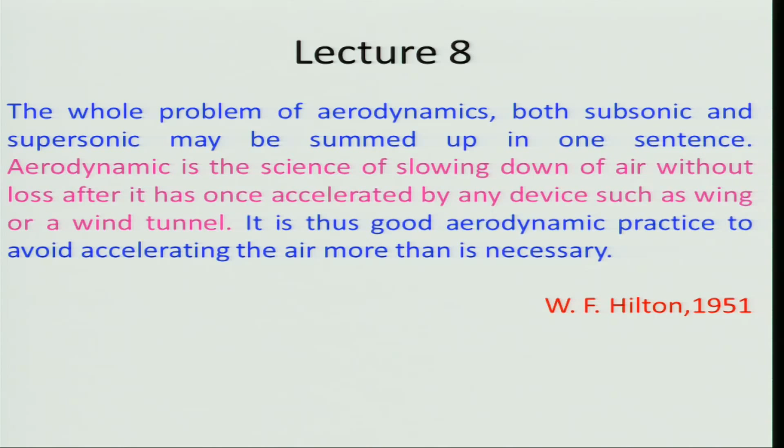Aerodynamics is the science of slowing down air without loss after it has once been accelerated by any device, such as a wing or a wind tunnel. I would suggest this applies whether it's flow over a wing or flow through propulsive devices. It is thus good aerodynamic practice to avoid accelerating the air more than is necessary. This is a very important statement, meaning we should not accelerate the flow beyond what is required, and that is the basic principle in designing a propulsive device.

And so, in analyzing this, we need to look at compressible flow. I had already initiated discussion in the last lecture on compressible flow, and if you recall, I asked whether a fluid or a flow will be compressible. Then we define a term known as the compressibility factor.

We are using the symbol K, but there might be other symbols for compressibility factor. I told you it is the change in density divided by the change in pressure — in other words, change in density per change in pressure, per unit density. That's what we call the compressibility factor. We also talked about other definitions, because this is a more general one.

To be more specific, one has to talk about the compressibility factor for isothermal flow conditions or for isentropic flow. Considering the flow to be isentropic, we use those definitions to derive the equation for speed of sound.

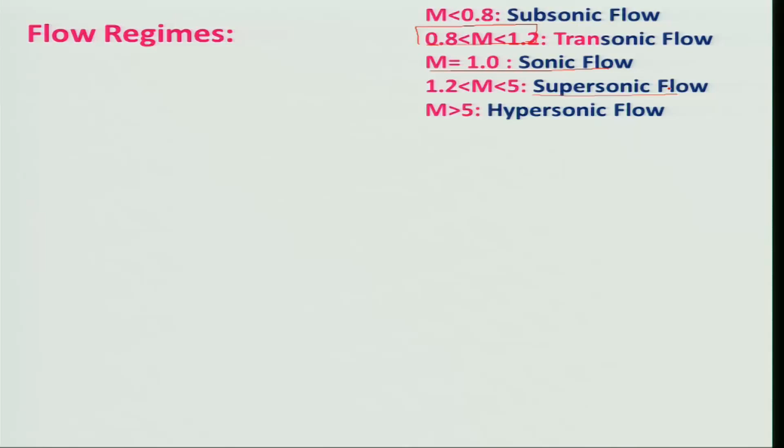The question is, when can we call a flow subsonic? For that, let us consider a flow over an aerofoil. This is basically a slender body, and if the Mach number coming is less than 0.8, that means it is subsonic according to this regime.

Now, what will happen if the flow has uniform velocity? Here you can see these arrows showing uniform velocity, and if it moves giving a smooth streamline around this aerofoil - what does it indicate? It will be subsonic. If it is subsonic throughout this region, then we call it a subsonic flow.

But I have a doubt - why are these streamlines like this? If flow is coming, for example, over here, something like a uniform flow, let's say in a wind tunnel kind of setup, because uniform flow in nature is difficult to get.

So what will I do? I will put a body like a slender body, aerodynamic or aerofoil shape. If I do that, what will happen? The fluid will be moving. If I take this coming over here, it will be impinging, and then there might be another one, I can see it goes this way. Why does it go? Is it intelligent like us, that fluid element?

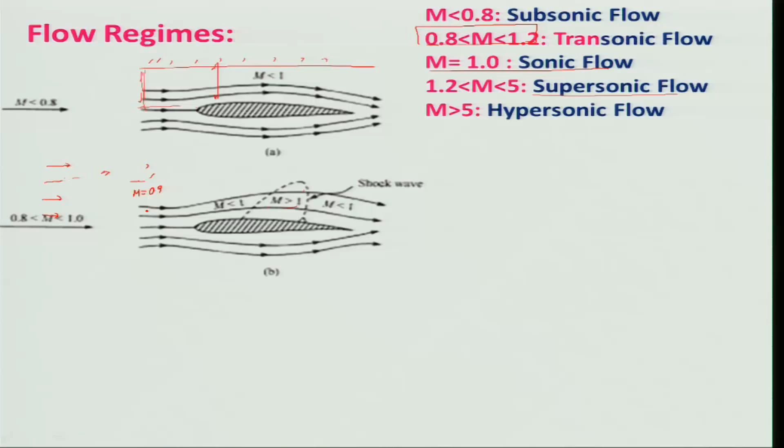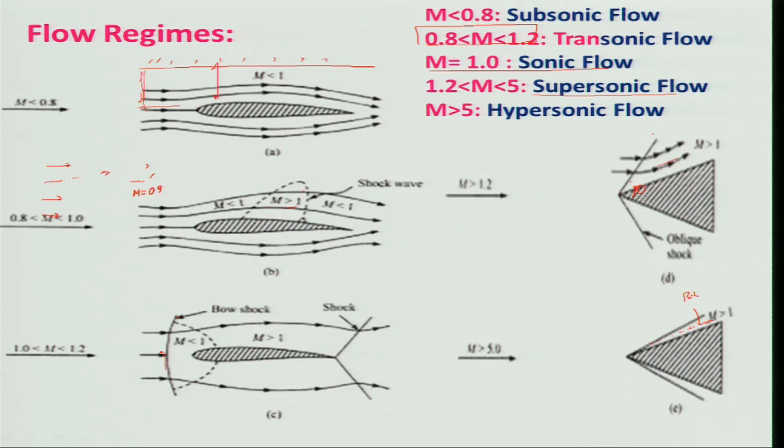So this is the flow regime which you must understand, and we will be revisiting it in detail about oblique shock, and there will be a normal shock in some region that we will talk about, and how to handle expansion shock, expansions and other things.

Now I want to analyze this, and as the name indicates, this is adiabatic flow. Therefore there will not be any heat interactions, heat is not going out, and it is steady. For that, we can consider it as a steady one dimensional flow.

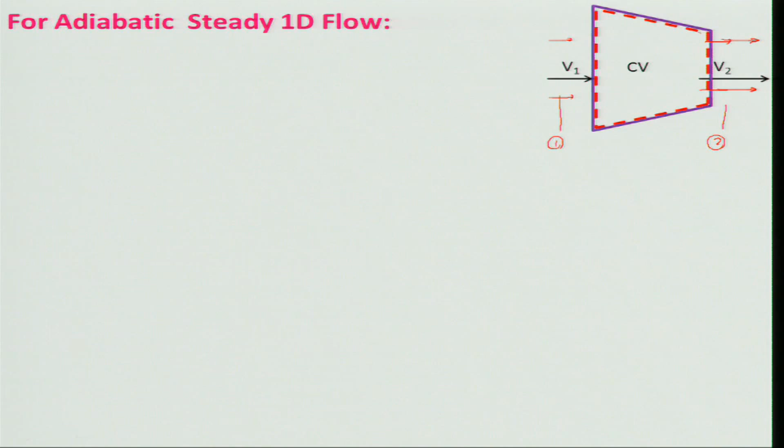And then we will have to apply the first law of thermodynamics for the control volume. What are the conditions we will be looking at? We will be looking at the adiabatic condition, Q will be 0, meaning Q, the specific heat interaction, is 0, and there is no shaft work as such.

But can I consider this as a one dimensional flow? Is it possible, or will it be two dimensional flow, or three dimensional flow? It will be two dimensional. Is it so?

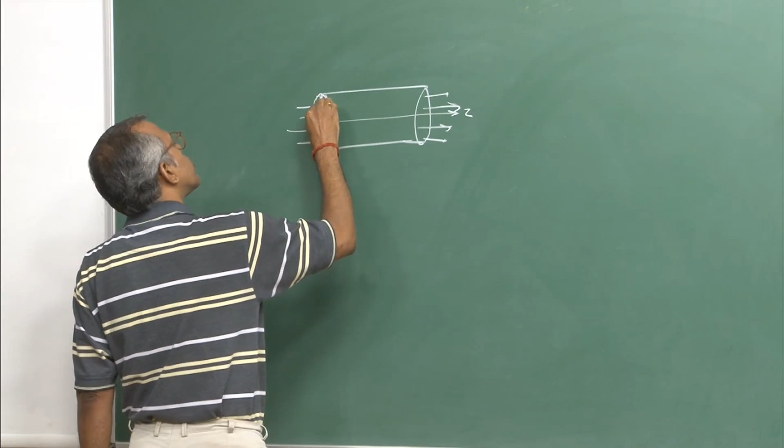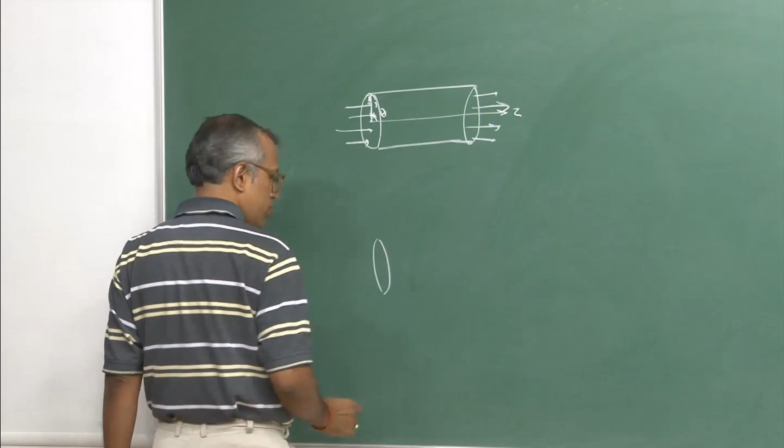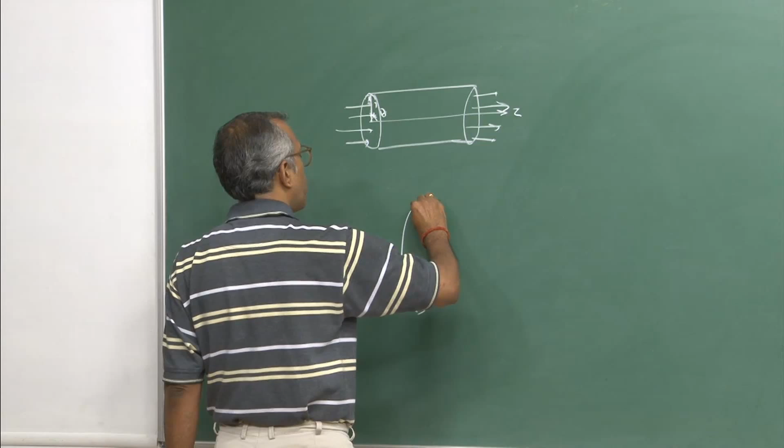For example, if I take a pipe flow simply in a constant area, flow is taking place here, and I can say this is my z direction and this is my r direction. Of course this will be my theta direction. And similarly I will take another one, let us say my z direction, r direction, and this is my theta direction.

In this case, if I look at flow properties, I will assume there is no boundary layer on the surface, that is also important, or I will assume it is a fully developed flow, meaning flow is already developed here, there is no change, meaning there is another portion which I have not drawn.

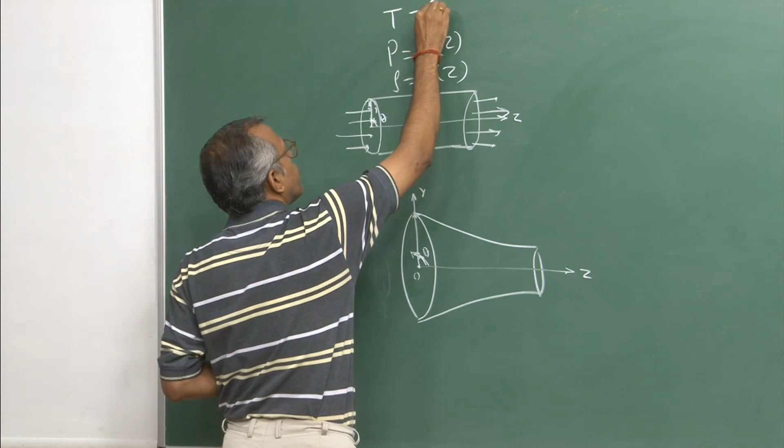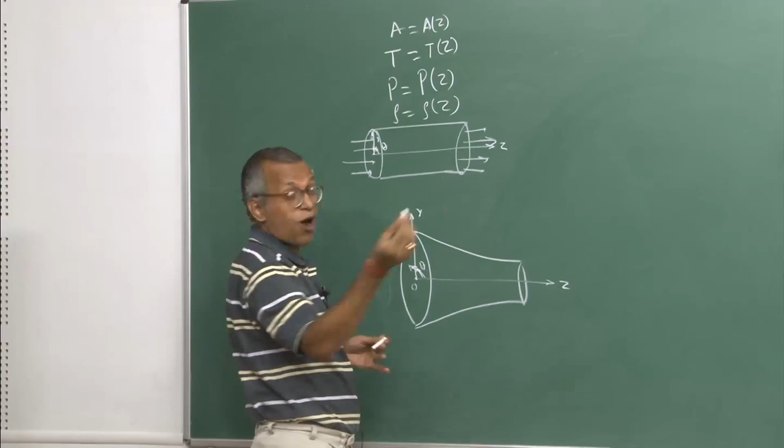Then what will be the properties? Pressure at each point will be a function of z, rho is a function of z, similarly temperature is a function of z. What about area? In this case, is area a function of z or not? It is not a function of z, it is constant. Cross sectional area is constant.

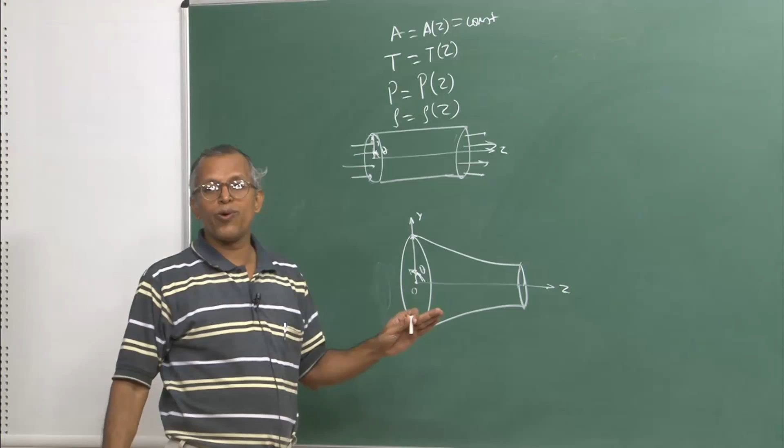But in this case, in reality this flow will not be one dimensional, but I can call it a one dimensional flow. Can I call this flow one dimensional? If flow is taking place this way, can I call it so? I cannot.

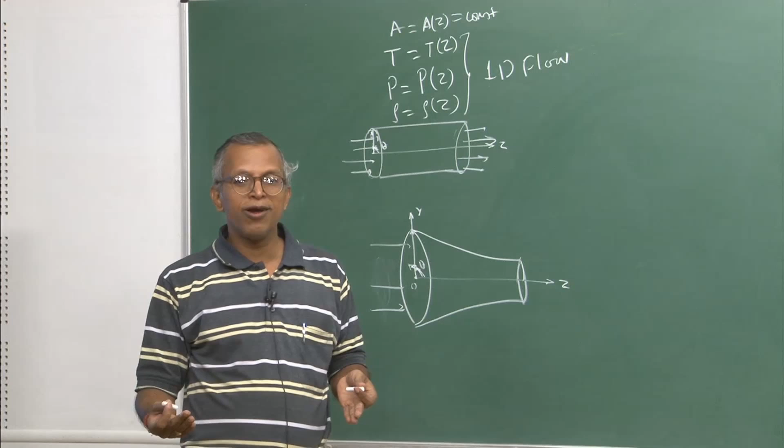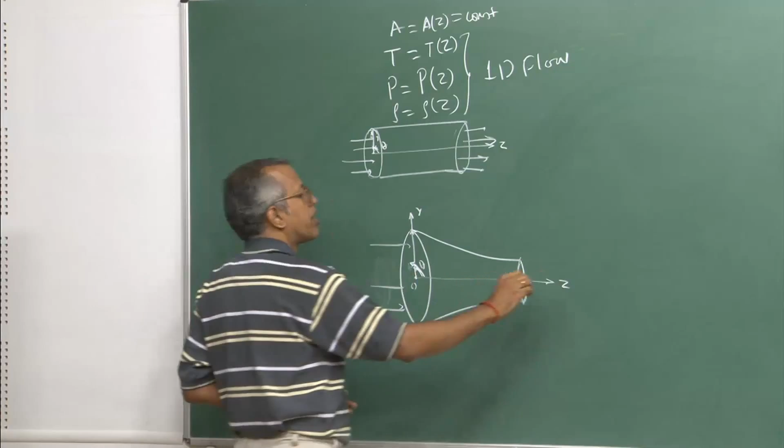In principle it will be three dimensional, but if I draw this, and if I take any theta direction, any cross section theta, if I take d theta kind of things, it will be same. So therefore this symmetry is there and everywhere flow is same, then I can say it is two dimensional now. But if I assume this is symmetric in the theta direction, I can call it two dimensional, one is the z direction, other is the r direction.

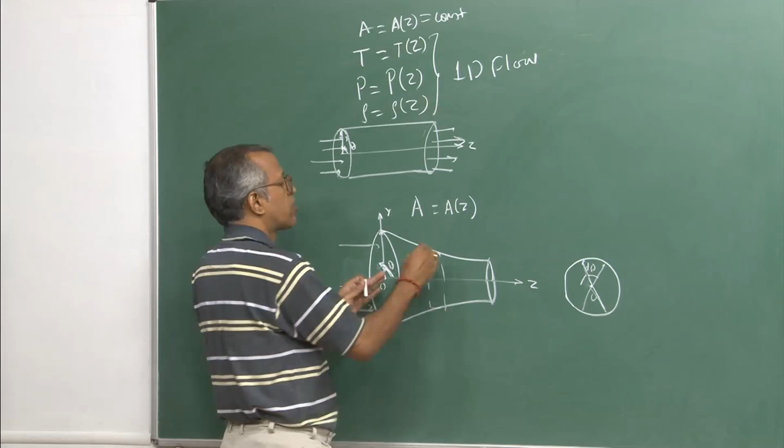But if the area is changing along with z, and if the change is very very small, if I take an element over here, keep in mind this is circular, and the rate at which the change is taking place is very very small, then I can assume it to be quasi one dimensional.

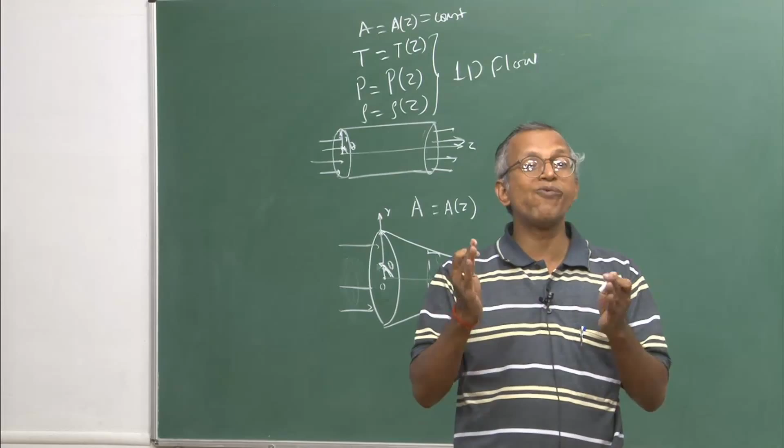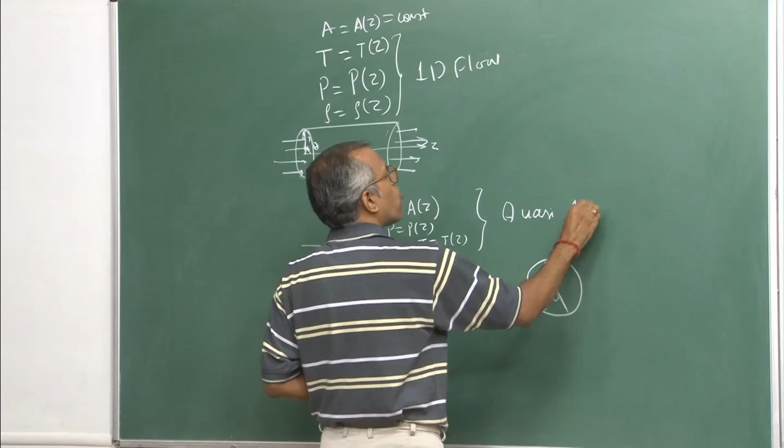That is, P is a function of z, similarly T is a function of z, and all other properties. Then we call it a quasi one-dimensional flow. This is a very important concept you must understand.

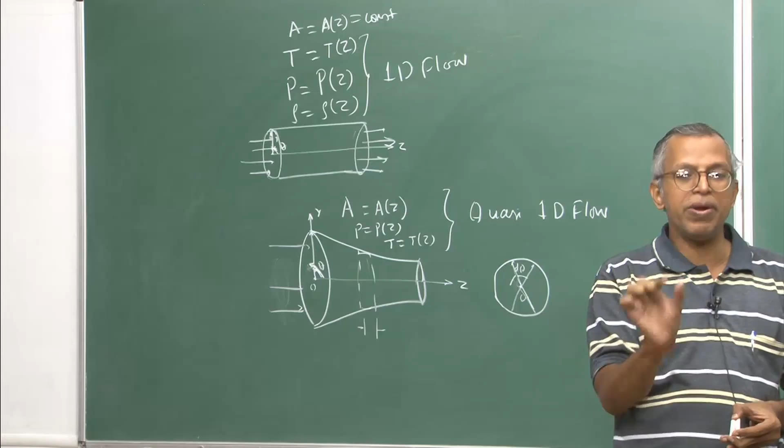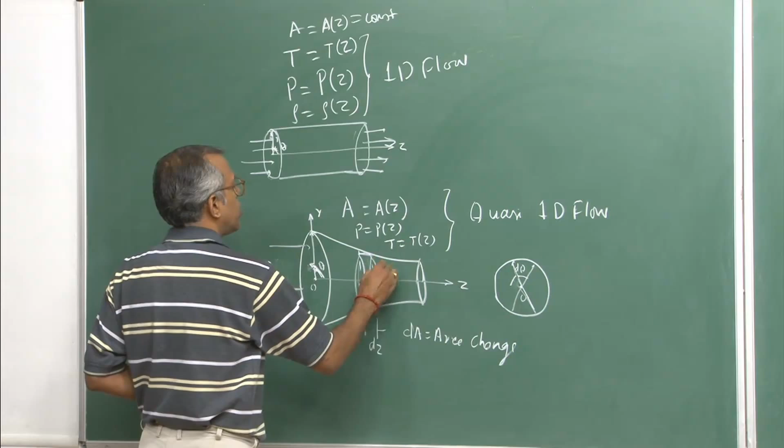Here the rate at which area is decreasing along the z direction is very, very small, such that properties are not changing if you take a small element like this. This is my element, dz in the z direction, and the area change will be dA. If I take this cross section, the change in area in comparison will be very, very small.

So this is a very important concept you must appreciate, and here we are doing the similar thing as well. However, it is not very obvious from the equation, we will be looking at it in detail later on. Here I am considering this.

Equation of first law of thermodynamics for a control volume, which states that H1 plus V1 square divided by 2 is equal to H2 plus V2 square divided by 2. Now, this equation I have just written, do you agree with this? How has it come? From where has it come?

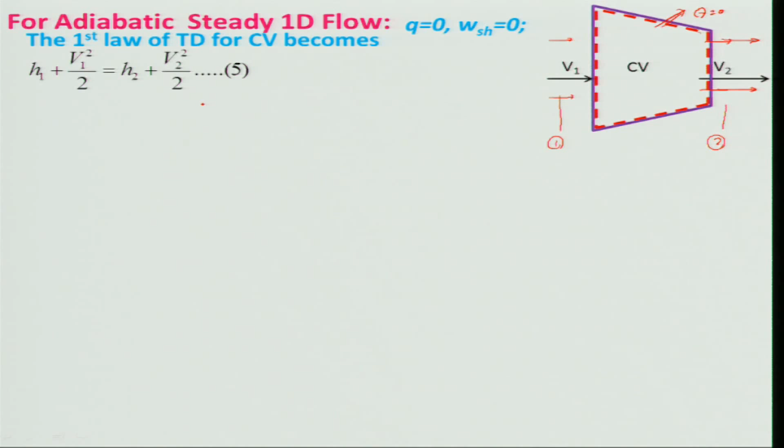From the energy equation. So if I want to write down the energy equation, what would it be? I must know that. Then I will have to make the assumptions: Q is equal to 0, shaft work is 0, and there is no gravitational or potential energy change. Let me write it down for you.

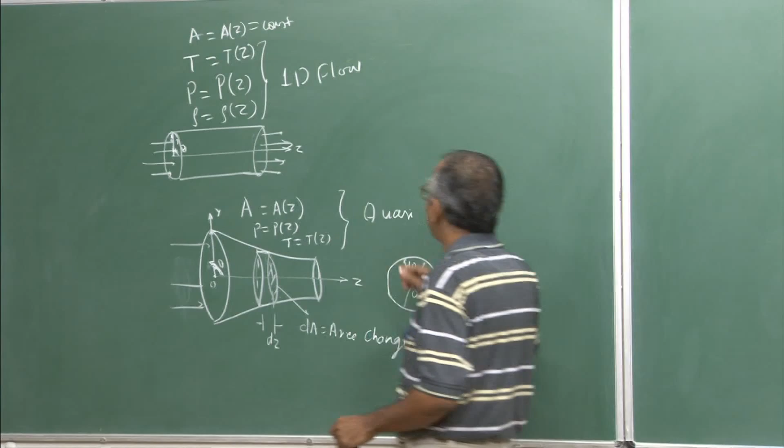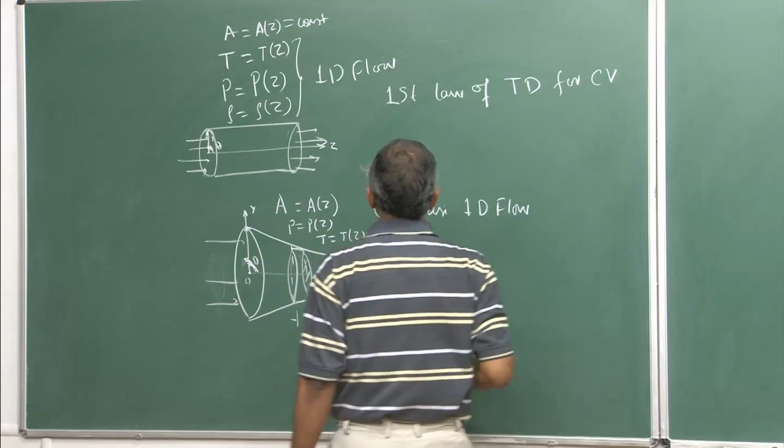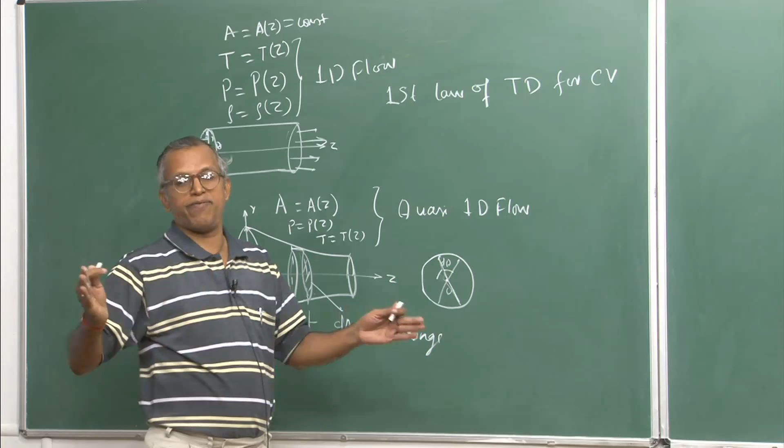So if you look at this equation, thermodynamics for a control volume, keep in mind that we are considering one dimensional flow. That is very important. Generally, flow is uniform across the cross section we are considering.

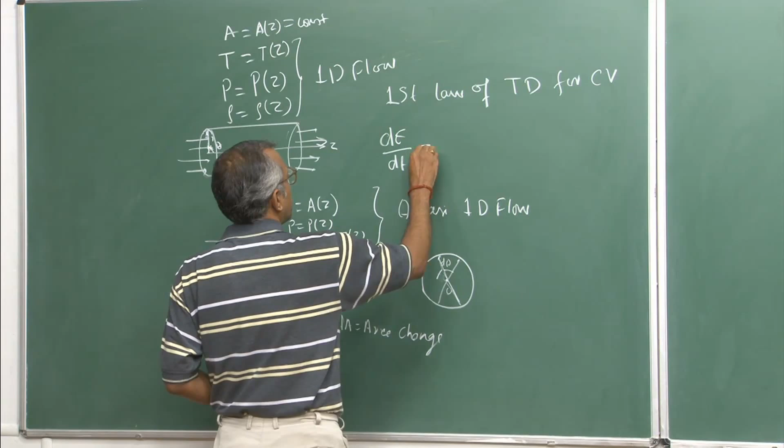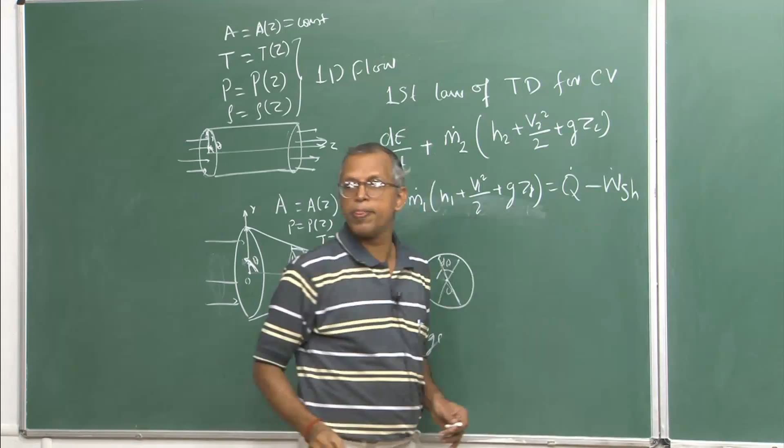So I can write down dE by dt is equal to, if I take station 2, m dot 2 times H2 plus V2 square by 2 plus G Z2, minus m dot 1 times H1 plus V1 square by 2 plus G Z1, equals Q dot minus W shaft. Now in this case, we are not considering these potential energy terms, this is a steady flow, and there is adiabatic flow, there is no shaft work.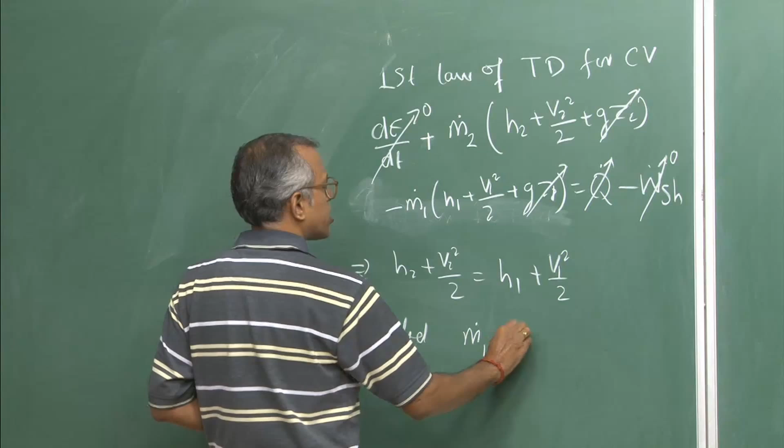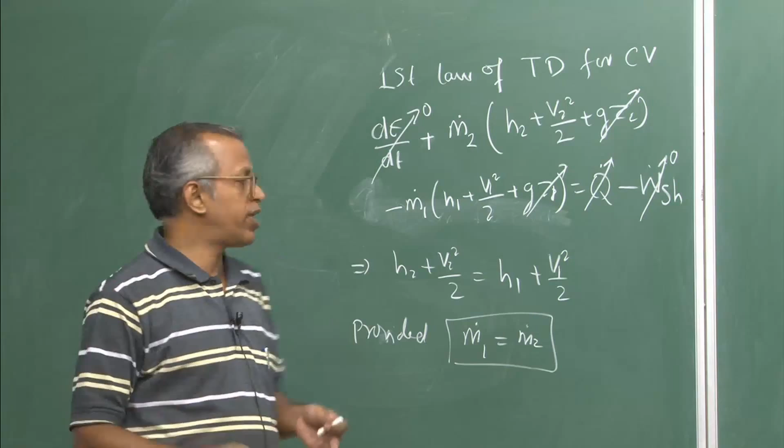Then I will get H2 plus V2 square by 2 is equal to H1 plus V1 square by 2, provided what? Provided m dot 1 is equal to m dot 2. Is it true? Because if I apply the continuity equation, one dimensional continuity equation, what would it be?

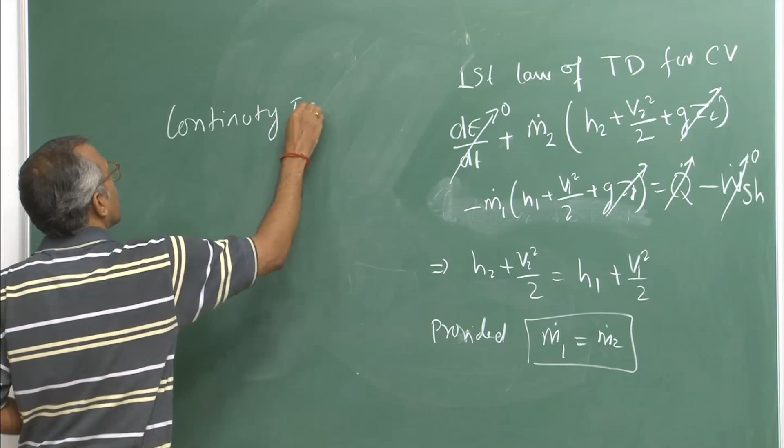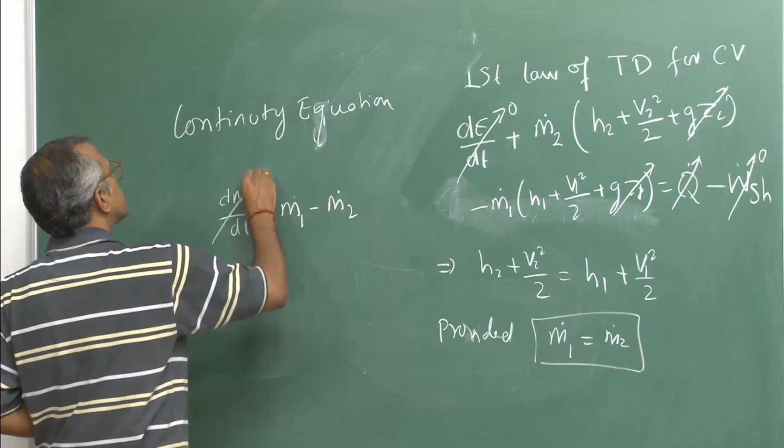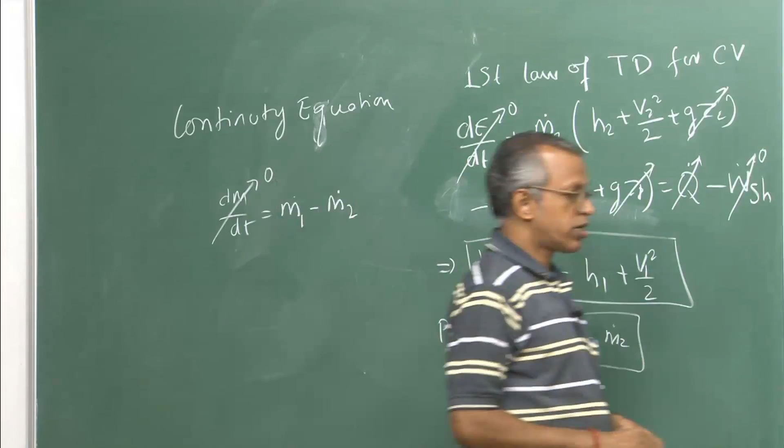dm by dt is equal to m dot 1 minus m dot 2. This is 0 because of steady flow. So therefore, m dot 1 is equal to m dot 2, and then we arrive at this, and this is the energy equation for one dimensional flow under steady state condition, with no shaft work and adiabatic in nature.

So if I convert this equation in terms of temperature, what would I do? I can write in place of enthalpy, Cp T1 plus V1 square divided by 2 is equal to Cp T2 plus V2 square divided by 2. How could I write this? Under what condition can I do this?

Can anybody tell me? We are assuming it as an ideal gas. What kind of ideal gas is it? It will be a calorically perfect gas, because Cp is a function of temperature, and Cp is also a function of the kind of fluid. If it is oxygen, it will be different. If it is helium, it will be different. If it is carbon dioxide, it is different.

What is the difference between the three examples I have given? One is monomolecular, dimolecular, and trimolecular structures, atomic in nature. Therefore its Cp will be different, and here we are assuming that the specific heat, or Cp, is not a function of temperature.

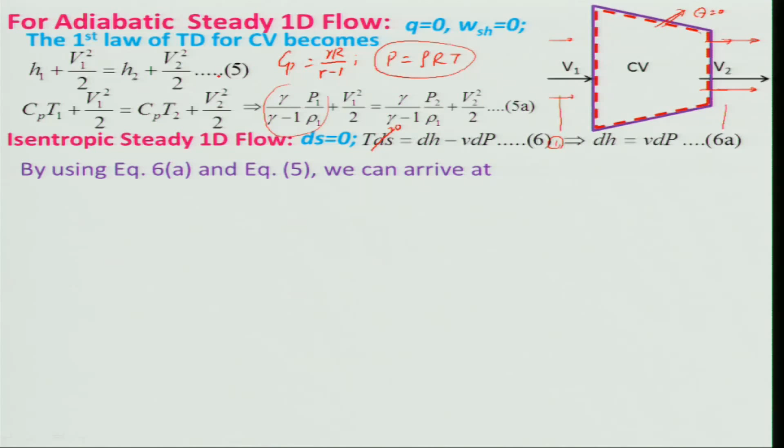So if it is an isentropic flow, then I can make it 0. What does this indicate? This expression, equation 6, indicates that dH is equal to VdP. And then if I use this equation 6 in equation 5, which is nothing but the energy equation for adiabatic flow, but not isentropic - then what will I get?

I will get an expression: P1 plus rho1 V1 squared divided by 2 is equal to P2 plus rho2 V2 squared divided by 2, which is very familiar to you, right. What is this equation? This is your Bernoulli's equation.

What is the validity of this equation, and what does it indicate to you? If you look at these terms, what does this basically say? The first one is your pressure - that means this is the pressure work. The work will be done on the fluid so that it can flow, and as a result there will be kinetic energy, a change in energy. That means, if pressure increases, what happens to the velocity?

It decreases. But we know that if the pressure gradient is more, then velocity will be more. There is something contradictory, am I right? Then how will we interpret this?

If I take station 1 with pressure P1, at that same place the velocity will be V1. If pressure decreases at station 2, what happens to the velocity? Velocity will be higher, because the total is remaining constant.

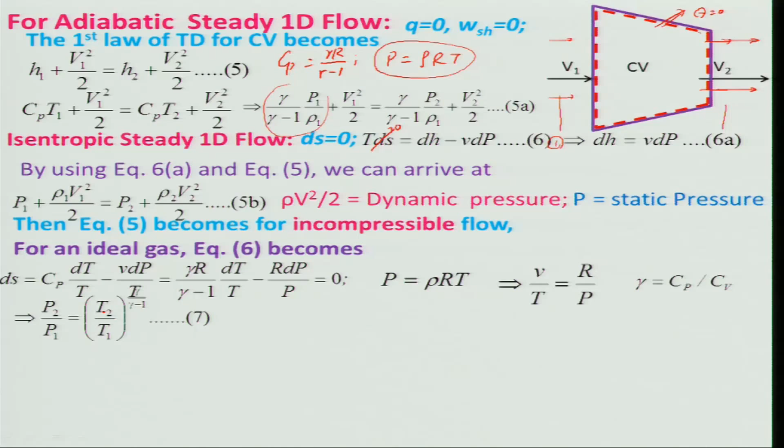With this I will stop, but let me ask a question before stopping. Why do we need to look at these isentropic flow equations, which are being used profusely and will be used left and right in our analysis? Why is it so? We should think about it. Any questions? Okay, thank you very much.